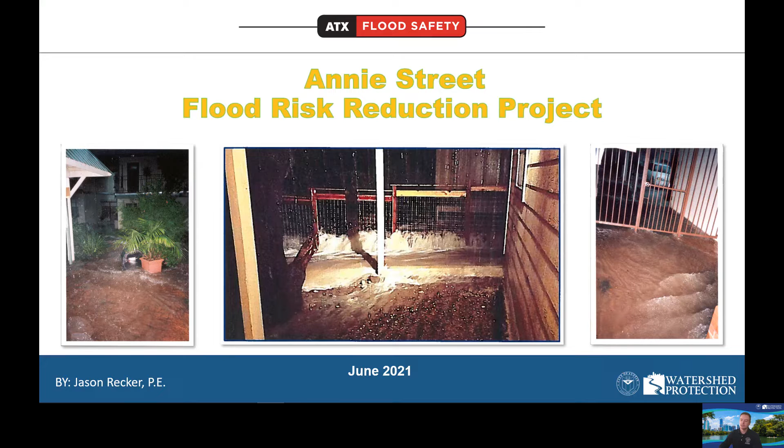So today I'll be presenting on some flooding background, storm drain system concepts, and the capital improvement project (CIP) process. Then we'll go over the results from the preliminary engineering report, walk us through a couple of the alternatives looked at in depth during that phase, and then look at the estimated schedule and provide some information resources for flooding info, as well as project updates.

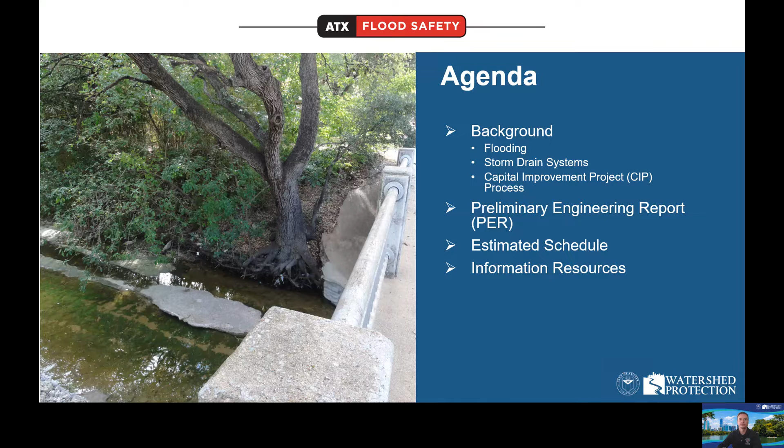So the two types of flooding we see in the City of Austin are creek flooding, and this occurs when a creek rises over its banks. This occurs around creeks, streams, or ditches. Then we have localized flooding, which occurs away from creeks, and this is mainly due to an inadequate storm drain system. When the rainfall hits the street, a system is supposed to convey that water away from the street and into a creek or pond. If the system is inadequate, then it results in ponding, which results in flooding, and that's the case we have for Annie Street.

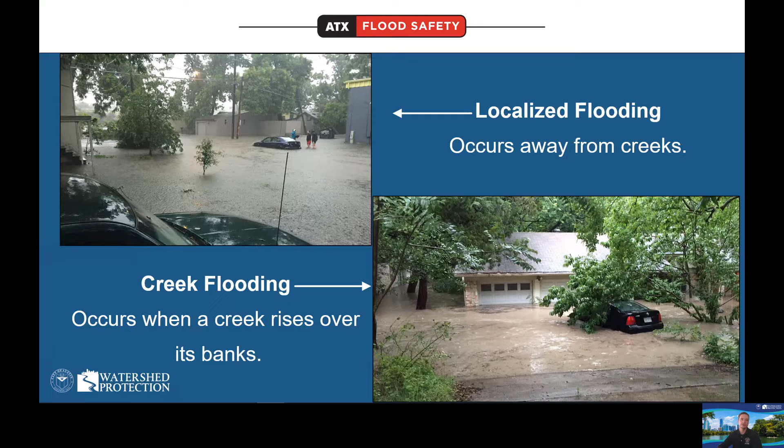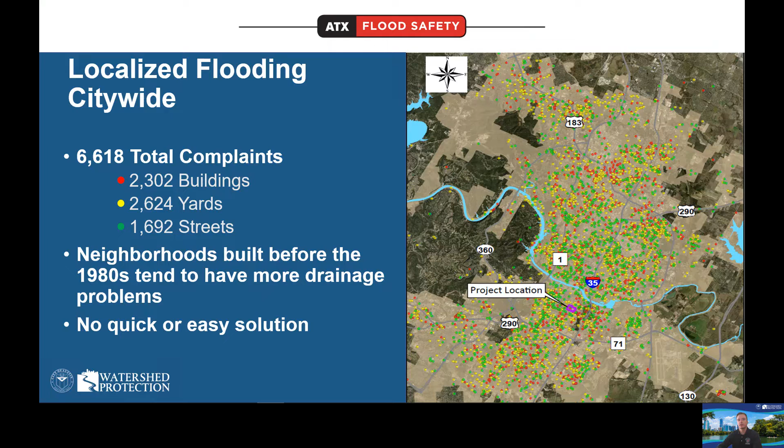We see a majority of these in neighborhoods built before the 1980s. They tend to have more drainage problems before certain codes and specifications were put into place. And we find that there's usually no quick or easy solution. It usually requires a CIP project, which requires a lot of time and a lot of money. You can see the call out there for the project location. That is the Annie Street location, and we'll zoom in on that.

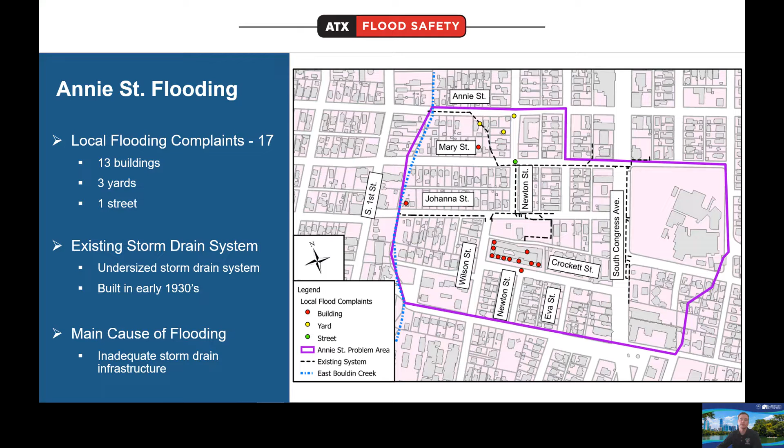The purple boundary is the Annie Street project area. There's 13 building flooding complaints in this area, 3 yard flooding complaints, and 1 street flooding complaint. The black dashed line is the existing infrastructure for the Annie Street area. It's an undersized storm drain system for the storm events we experience in this area, and some of it was built as early as the 1930s. So we've determined the main cause of flooding for this area to be an inadequate storm drain system.

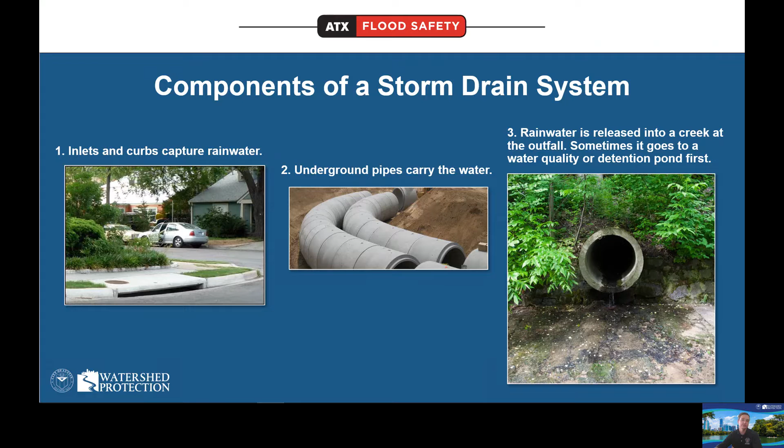So what is a storm drain system? Picture 1 shows a curb inlet, which I'm sure you've seen. When the rainwater hits the street or the sidewalk, it's sloped to convey it to these inlets, which will then convey it to an underground set of pipes shown in picture 2. The underground set of pipes then convey it to an outfall into a creek, or sometimes a water quality or detention pond. In our case with Annie Street, it conveys it into an outfall into East Bouldin Creek.

As I mentioned, the solution to these problems, updating the storm drain infrastructure, usually takes a lot of time and a lot of money, and that's usually a capital improvement project. So I'm going to walk us through the different phases of the CIP project process. At Watershed, we start with the complaint data that I went over earlier. We identify problem areas within the city, and then we do an internal feasibility study on those areas to determine if there's a feasible solution to that problem.

If we deem there is, then we will move it to the preliminary engineering phase. From there, we look at existing modeling and come up with multiple alternatives, and then we recommend the most feasible alternative going forward into design, which is where we currently are with the Annie Street project. In the design phase, we take that recommended alternative from the preliminary engineering phase, and we look at it in detail. We break it down and we create a design plan set that we will then award to a contractor in the permitting and bidding phase, and then the contractor will perform the last phase of this process, which is construction.

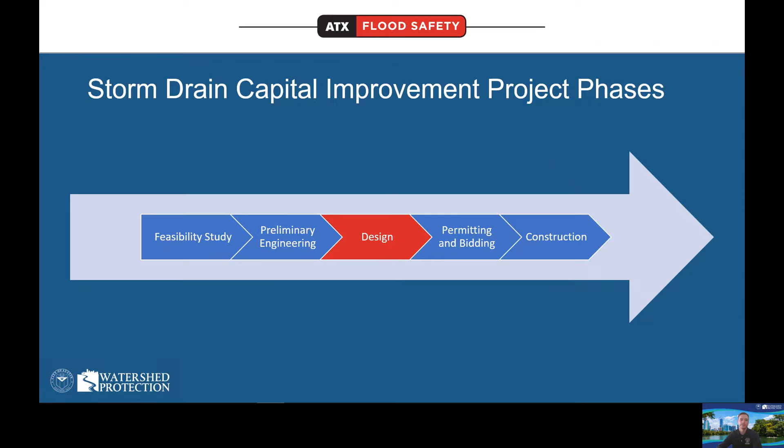And we can put in various alignments and see the different results it has. We know how much water is going there, so we know how big the pipe should be. Another aspect we look at in modeling is showing no adverse flooding impacts. So we want to create a solution to this area, but we want to ensure we're not causing flooding issues downstream. And when we look at that, we ensure that there's no adverse flooding impact downstream of our area.

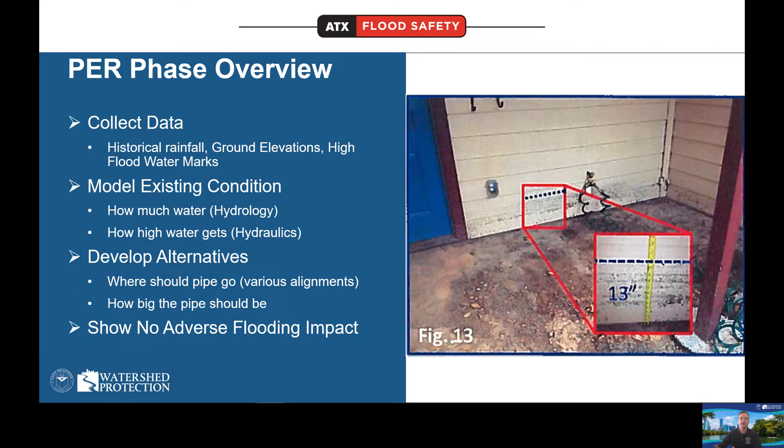As I mentioned before about adverse impact, when that modeling was looked at during this alternative, it was determined that we needed to modify the East Bouldin Creek channel, and that included 2,200 linear feet of channel modifications. This was looked at and discussed internally with Watershed, and ultimately this alternative was not recommended due to those channel modifications.

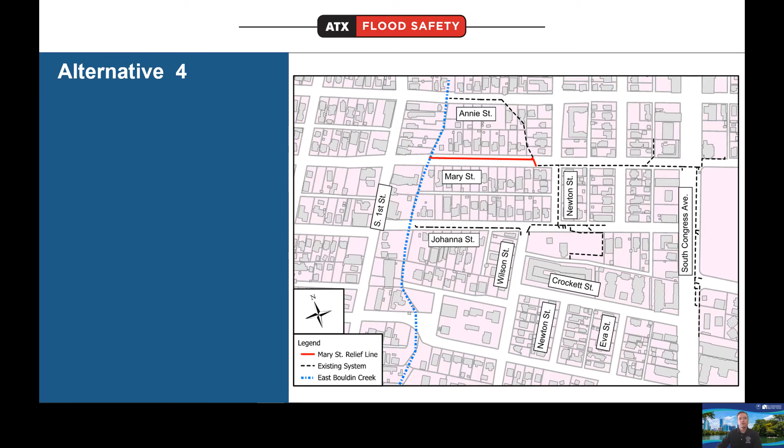So moving on to alternative 4, and I do want to mention alternative 2 and 3 real quickly. Alternative 2 also had adverse flooding impacts like alternative 1, and also required channel modifications. Alternative 3 is similar to alternative 4, but has larger storm drain pipes, which conflicted with the existing utilities in the area. So going forward with alternative 4, it is the recommended alternative.

The proposed storm drain is in gold, and I'm going to describe it from the bottom of the page up. So we have new storm drain along Eva and Newton, feeding into a line along Crockett Street that feeds into a Wilson Street line, into an upsized Johanna Street line. And then we have new line along Johanna Street, upsized line along Newton and Mary, and some new line along Annie Street into an upsized outfall along Annie Street. We are still abandoning the storm drain line between Annie and Mary Street.

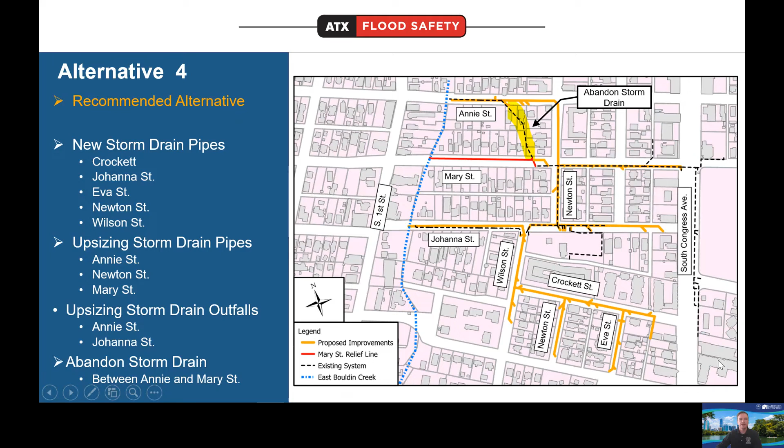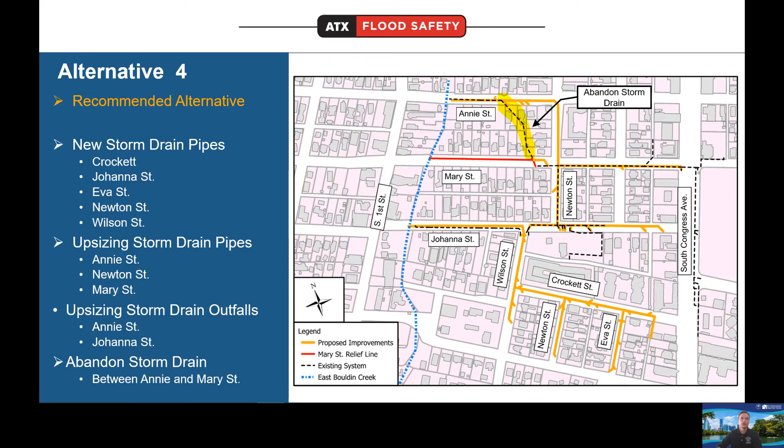And with the provided benefit of the reduced risk of flooding for the area, the abandonment of that storm drain line that will no longer receive flow, and no channel modifications, alternative 4 was the recommended alternative going forward into design. So let's look at this alternative a little closer. The total estimated cost is $8.5 million. Some of the main components include 6,400 feet of storm drain pipe, 34 storm drain inlets, and upsized storm drain outfalls on Annie and Johanna Street. The benefits are it provides street conveyance of storm water that meets current code requirements. It also abandons that storm drain between Mary and Annie Street.